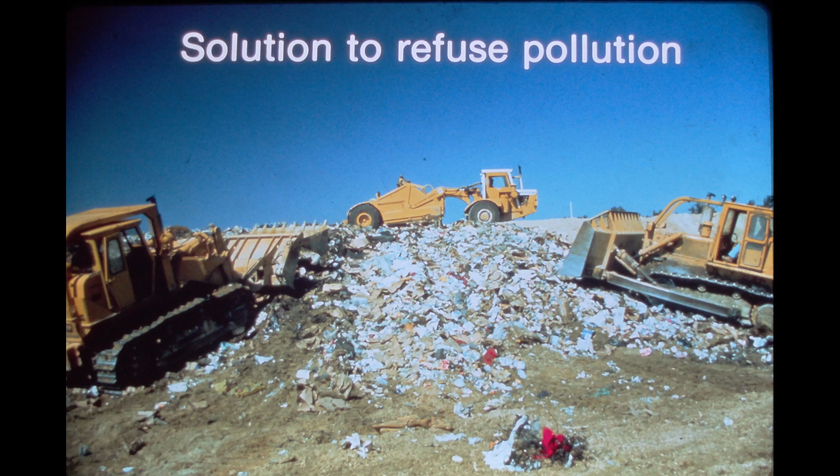The International Payline Group wants to offer you a solution to refuse pollution. This is refuse, waste material with many different classifications: garbage, ashes, unwanted cars and trucks, just to name a few. Refuse has been a problem since the beginning of man. Through the years, we've solved the problem in different ways.

Indians found it easiest to pack up their teepees and move to another location. When our forefathers established permanent settlements, they simply unloaded their refuse on a vacant piece of land. Thus, we have the establishment of the well-known dump. Of course, with the dump came thousands of rats, millions of insects, and disease and odor. Today, the disposal of refuse is one of the fastest-growing problems we must deal with.

Engineering News and Record magazine surveyed this problem and found the following. In 1916, 95 million people produced 90 million pounds of refuse daily. That's equivalent to 0.9 pounds per person daily. They derived formulas which projected figures showing that in 1986, 265 million people will produce 2.4 billion pounds of refuse, or over 9 pounds per person daily, 10 times as much.

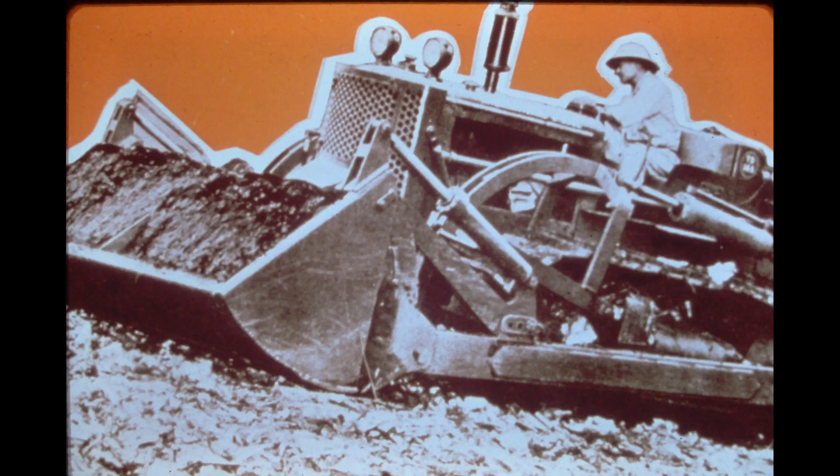Sanitary landfill isn't the kind of business that plugs easily into set formulas. When you set up your operation, there's only one resource to draw on: experience. In the early 1940s, when the military was experimenting with the first landfills, International was called in to participate. And through this early cooperation with the government, we invented the ramp method. It was also during this period that International and Drott introduced the bull clam, later to develop into the multi-purpose bucket.

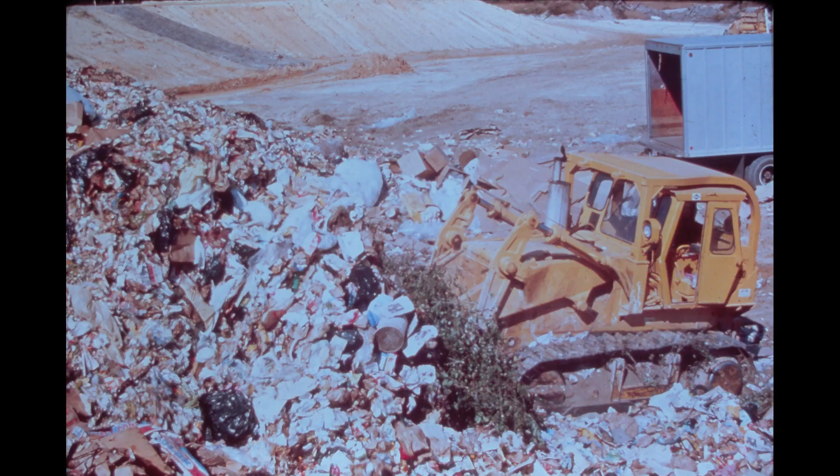Our close involvement in the landfill industry since its beginning has convinced us that it is the most effective way to cope with the refuse problem, and is being used in most of our communities today. Keep in mind that a landfill is not an earth-moving project, and by all means it is not a dump. Its attraction is a result of the advantages it provides over the other waste disposal methods. Let's take a look at some of its advantages.

Low initial investment. The basic requirements are a piece of land, equipment, and a well-planned program. Management is a must. Low operating costs. The equipment ownership and operating cost and necessary manpower is really all there is. Complete and final disposal of refuse. There is no leftover refuse at the completion of a landfill operation. It's neat and complete.

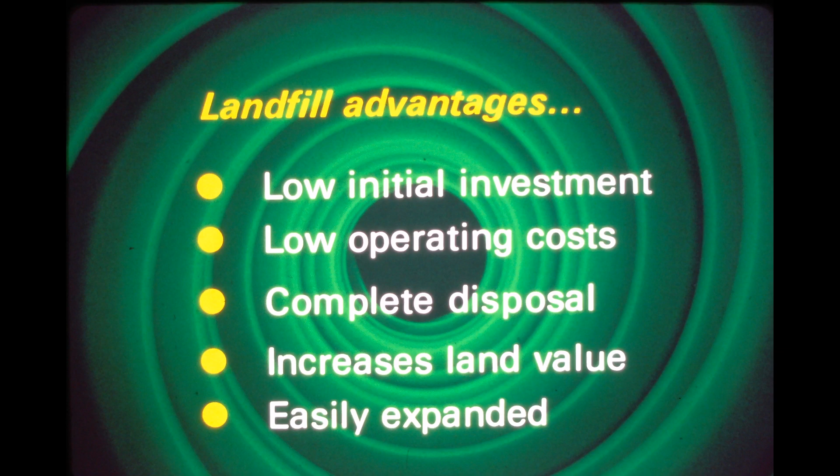Increases land value. Using wasteland gives the community an opportunity to improve the land for useful purposes such as parks, subdivisions, or industry. It's easily expanded. This method is flexible enough to easily adapt to the changing conditions of the community. Additional land is all that is needed. There is no pollution. Landfill operations do not add to one of today's biggest problems, in other words, air and water pollution.

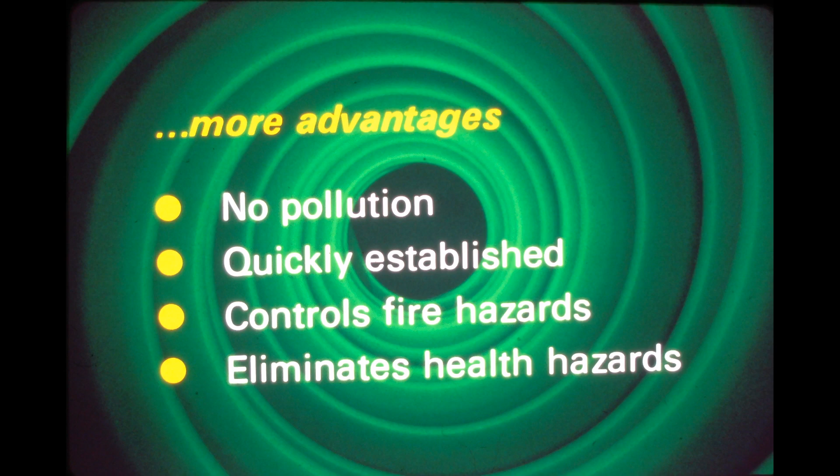It's quickly established. As soon as the equipment arrives on the site, the operation can begin. There's no lag time to contend with. It also controls fire hazards. By not letting refuse lay around, the chances of fire are virtually eliminated. But most important, a sanitary landfill operation eliminates rats, insects, and other vermin, not forgetting the problems they cause.

From an economic standpoint, two of these advantages, initial investment and operating costs, appear to be the most attractive. A closer analysis of the two explains why. Land. Ideally, marginal land can be obtained at reduced cost. But whatever the cost of the land, a large portion of this expense can be recovered through a higher resale value after it has been reclaimed as a result of the landfill process.

Planning and designing. A first-class consulting firm can provide the necessary expertise in the planning and design of your landfill, including testing, geology, and subsurface evaluation. Any land purchase should be contingent upon subsurface exploration. The consulting firm is also aware of and can cope with the legal and political issues which will surely arise.

Site development. Land clearing, drainage features, building access roads, installing utilities, fencing, and landscaping are all functions which must be performed before the first load of refuse is dumped. Facilities. You will need administration and restroom accommodations for your personnel, as well as a maintenance shelter for equipment. Equipment. Equipment, which will be discussed later, can be your largest initial expenditure.

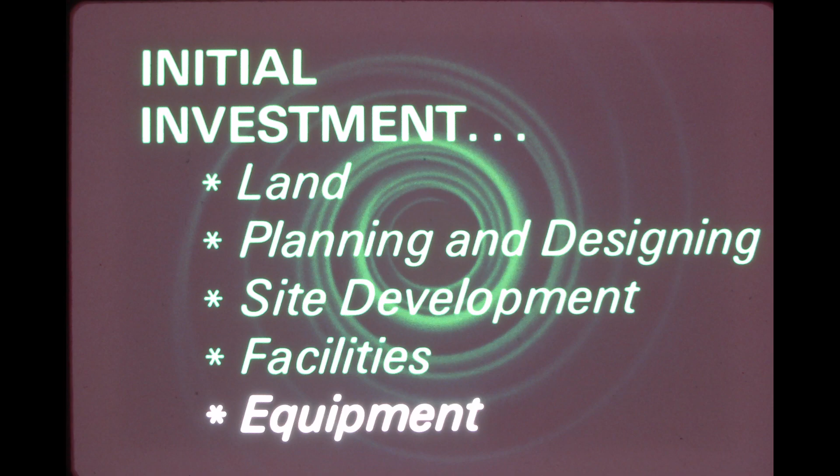In the operating costs area, the first item to be considered is personnel. Relatively large landfills can be effectively operated with minimal personnel requirements. Equipment. Equipment owning, operating, and maintenance costs are about 40% of the total operating costs. Miscellaneous. These costs, administration and overhead, for example, make up only about 10% of the total.

By necessity, this analysis is very general in scope and will widely vary according to the size, type, and operational efficiency of the individual landfill. For example, lack of cover material and/or use of a landfill method requiring excess handling of cover material might significantly reduce the profit margin of an operation. However, careful planning will help assure an efficient operation.

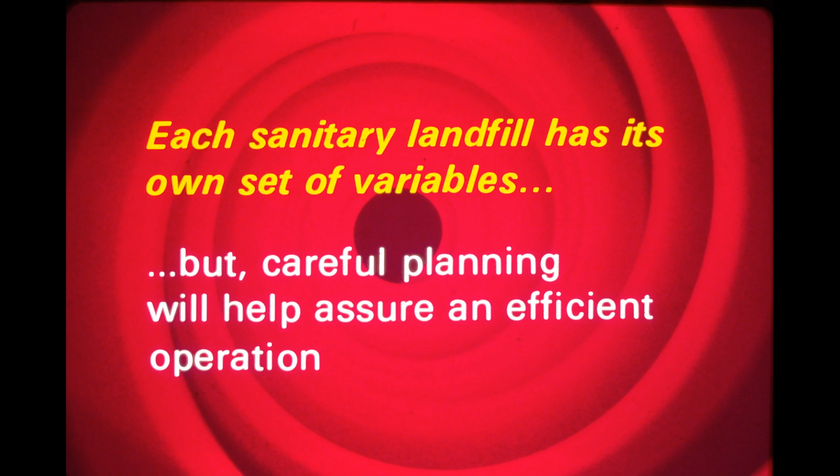Careful planning begins by selecting the proper landfill method. That is, how can the refuse be most efficiently buried on the property selected? Initial questions must be answered, such as, what methods are feasible for the community, and what are the limitations of each? What are the overall costs of each method? A successful solution for one may not work for another. Improper application of a method to your operation could be disastrous. Let's take a look at the available methods for disposing of daily refuse.

Basically, there are three methods to choose from: the trench method, the area method, and the ramp method. Analyze your needs. Don't let other landfills dictate your requirements. The method you select should depend entirely on the site. Choose the one that allows you to operate at the least expense.

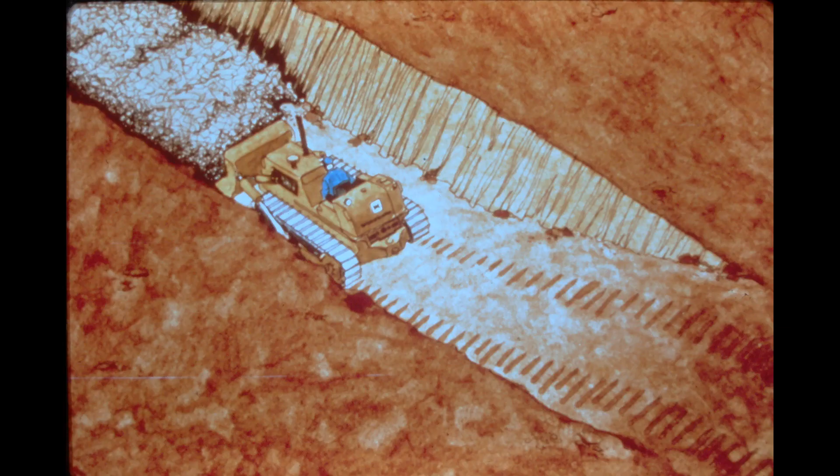The trench method is best suited for level or gently sloping land where the water table is not near the surface. If you're considering this method, remember that there is the need to handle cover material twice: excavating and stockpiling, and then filling. This is an added expense. There are three ways to work your trench, depending on how you choose to excavate.

One approach is the single progressive trench. In this technique, the trench is excavated only far enough to provide working space. As cover is needed, the excavation is continued. Since only 1 part cover is used to 4 parts refuse, you will constantly be faced with excess material.

A second approach is the single trench. In this approach, the entire trench is excavated. Cover material is windrowed along the trench sides. Excess material is removed all at one time. The windrows also act as wind breakers to cut down blowing papers. Additional help can be obtained by placing the working face on the windward side of the trench.

The third approach is the dual trench. An entire trench is excavated and the material is disposed of. A second parallel trench is begun at least 2 feet away from the first. As the second trench is excavated, it provides cover for the first. In this manner, trenches are consecutively dug until your site is exhausted.

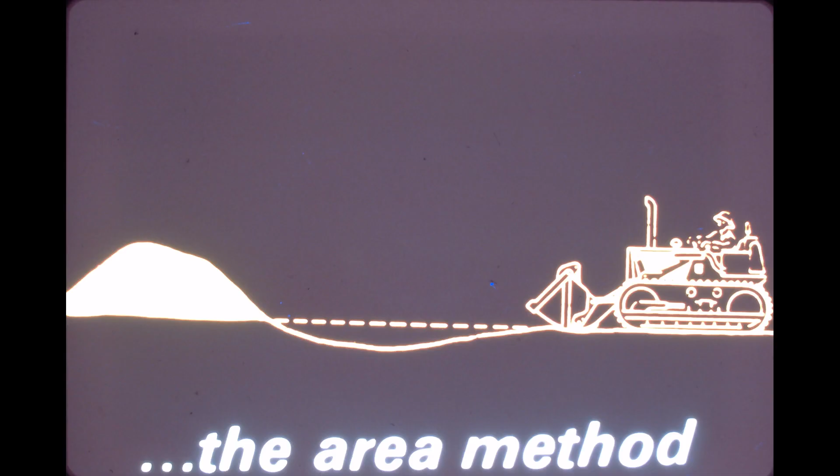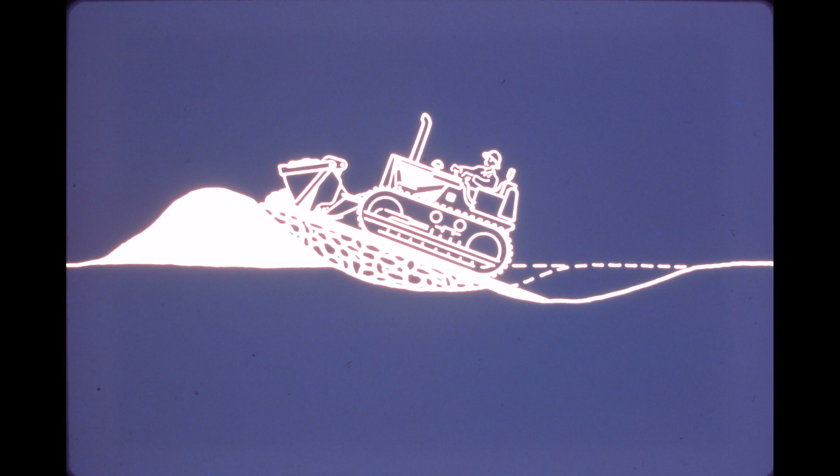The area method is best suited for flat land where the water table is near the surface. While using this method, cover material will probably have to be imported. This acquisition and added dirt handling can be a considerable expense. To begin, a small knoll of material must be formed. This will form your initial working face. Refuse cells are progressively formed, one lift at a time until the area is brought up to the grade you desire. Cell walls are formed by the adjacent cells.

The area method is nothing more than a special condition of the popular ramp method. Inability to dig downward and the lack of a natural working face dictate its use. The ramp method is the ideal approach. No dirt moving or advanced preparation is necessary. The side of a natural depression can be used for an initial working face. Although the water table should be considered, this is not nearly as critical a problem as it is when excavating trenches. Refuse is dumped at the base of the ramp.

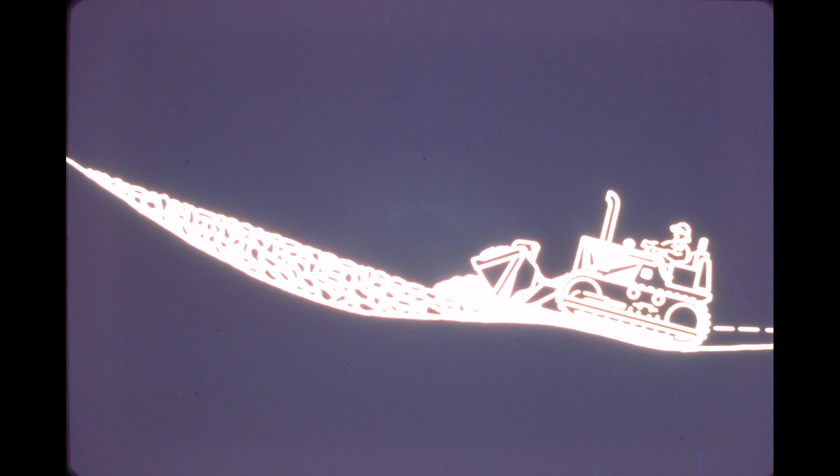The amount or number of loads dumped depends on the ramp size, the equipment size, and the daily tonnage to be handled. The refuse is then spread up the ramp in a layer not more than 2 feet thick and compacted into a layer not exceeding 6 inches. Generally, a compaction ratio of 4:1 is sought before additional spreading takes place. The procedure is repeated until the end of the day or until the cell reaches a height of 8 feet. At that point, cover material is spread over the refuse and compacted to a 6-inch layer.

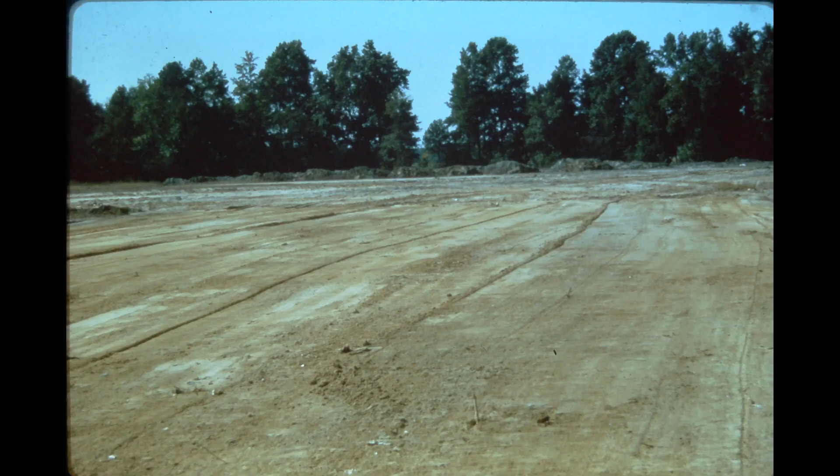At the end of the day, this is how the landfill should be left: clean and odorless, with no pests. No dumping should be allowed until morning, so that each day's deposit can be completely sealed with 6 inches of compacted cover material.

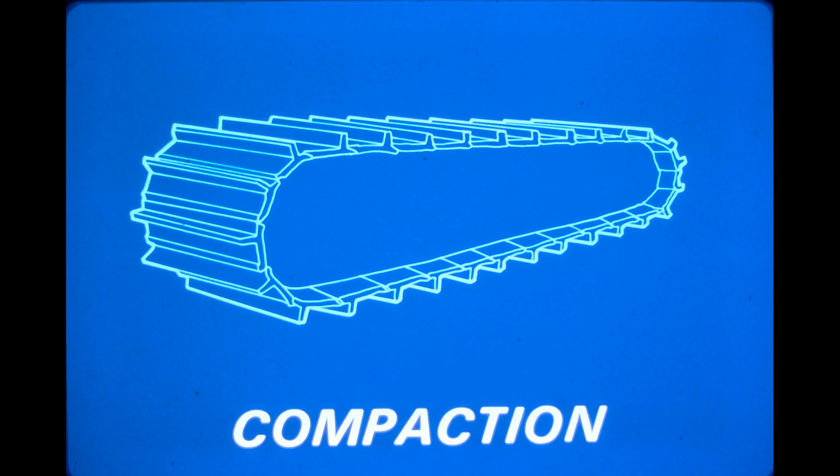While discussing landfill methods, we mentioned compaction of refuse. Proper compaction is critical for good final results in a landfill project. Let's take a closer look at compaction relative to construction equipment. Flotation and compaction are inverse functions. That is, the more capable your equipment is in obtaining one, the less capable it is in obtaining the other.

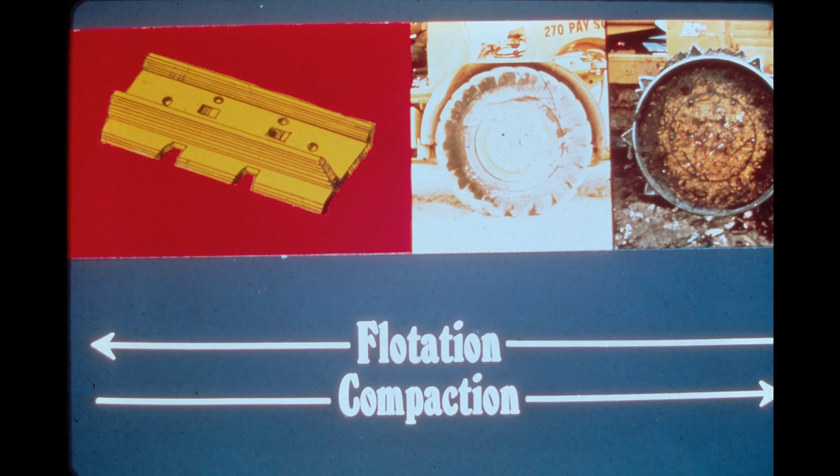Compaction is achieved from the proper combination of weight and pressure. A concentration of weight over an area provides the pressure necessary for compactive effort, or PSI. The smaller the area of concentration, the higher the PSI.

Because of its design as a flotation machine, a crawler dozer's compactive effort varies between 9 and 11 pounds per square inch. A crawler loader achieves slightly higher compaction than a dozer in its same horsepower class. This is possible because the shorter track of the loader allows the total weight of the machine to be concentrated over a smaller area.

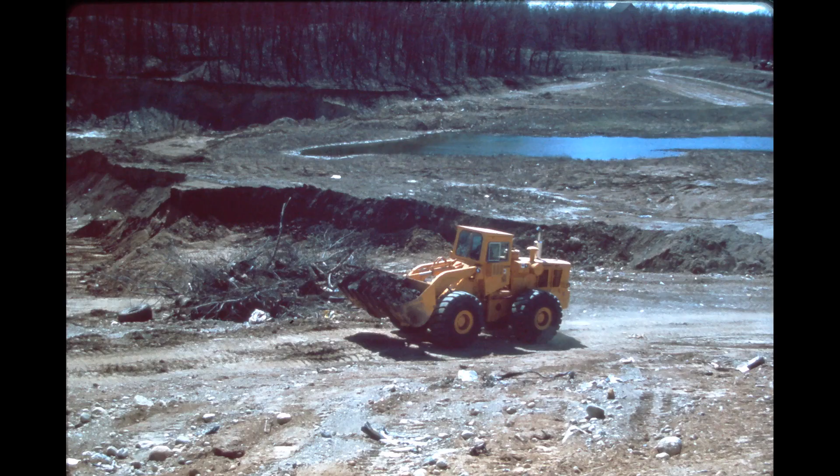A rubber-tired payloader can obtain as much as 3 times the pressure of a crawler machine. This results from the payloader's tire contact area being considerably smaller than the track on ground of the crawlers.

However, a high PSI can be obtained from the so-called ironing action of a crawler loader equipped with a multi-purpose bucket. The operator rests the loaded bucket on the refuse, applies slight down pressure, and drives forward. The weight of the machine with loaded bucket, hydraulic down pressure, and the thrust of the machine, all concentrated on the bucket compaction plate, yield ground pressures in excess of 50 pounds per square inch. This is the most efficient method of compaction when using crawler loaders.

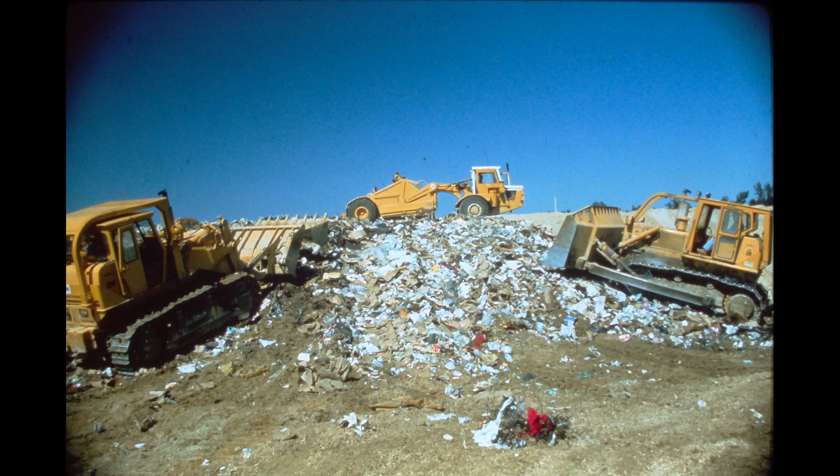Now, after you've chosen the proper method for your operation, it is time to make the most critical decision in making your landfill a success: machine selection. The real cause of an unsuccessful operation can almost always be traced back to improper machine selection. The sanitary landfill planner has 2 primary considerations when selecting equipment: the size and the type.

In earth moving, it's fairly simple to determine the size of the equipment which it will take to move all the material in pile A to pile B in a given time. The material being handled is easily classified, fairly consistent, and the production requirements are known. Refuse, on the other hand, is a mass consisting of garbage, trash, construction debris, and other assorted wastes. Incoming volumes may vary considerably, and fluctuations are unpredictable. How much daily cover material is required? How far must you transport it?

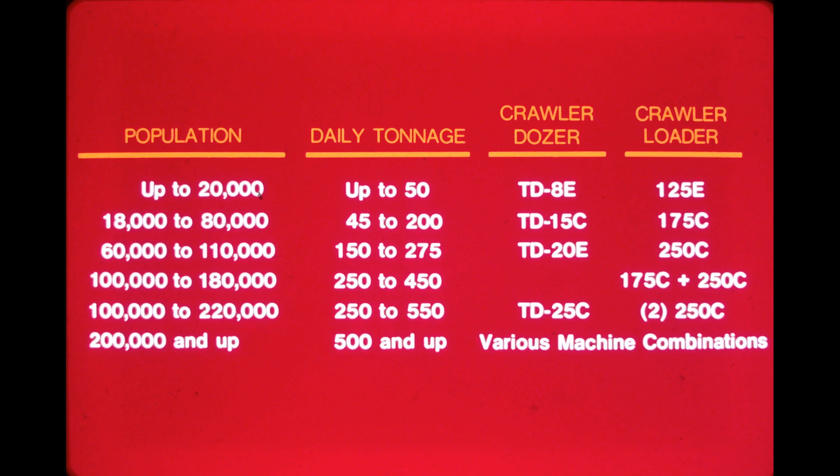There are no definite rules in equipment selection. There is only experience, and International, with its distributor organization, is the most experienced in the business. We suggest the following general guidelines based on population and average daily tonnage. These tonnage figures are based on 5 pounds per person per day, the current national average.

But a word of caution here. Refuse is currently being produced at a disproportionate rate to normal population increases. Therefore, the equipment you choose should have the capability of handling approximately 25% more refuse than is currently being generated.

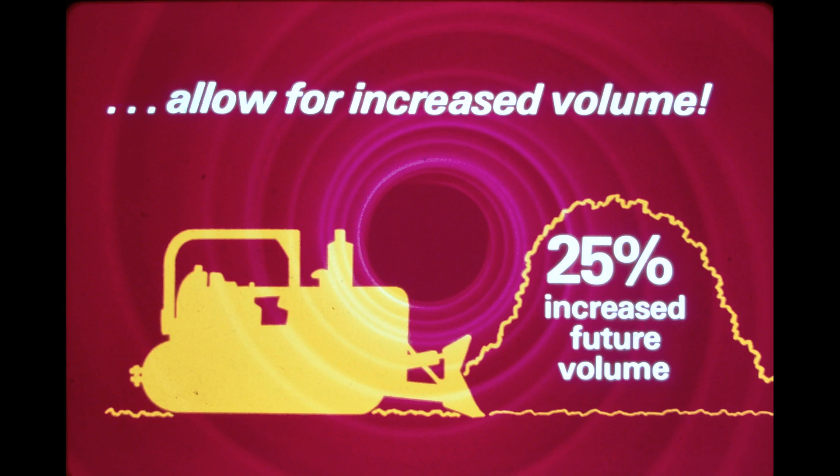Dirt moving distances, population size, and the method you choose for operation will be the primary concerns when selecting equipment. This selection breaks down into 4 categories: crawler dozers, crawler loaders, rubber-tired loaders, and scrapers. Crawler dozers are well suited for ramp and area fill methods. Up to about 300 feet, the dozer will effectively excavate and transport cover material. Beyond that distance, other equipment becomes more economical.

It is a machine capable of preparing the site, spreading, compacting, covering, building and maintaining access roads, and land clearing. Its excellent flotation and tractive ability make it an all-weather machine.

The crawler loader, especially when equipped with a multi-purpose bucket, is also an excellent tool for the area and ramp method. In addition, its highly efficient excavating capability makes it ideal for trench operations. For example, since the bucket doesn't extend outside the tracks, higher compaction is obtained close to the trench walls. Like the dozer, it is capable of functioning regardless of climate. Maximum cover haul distance is about 300 to 500 feet.

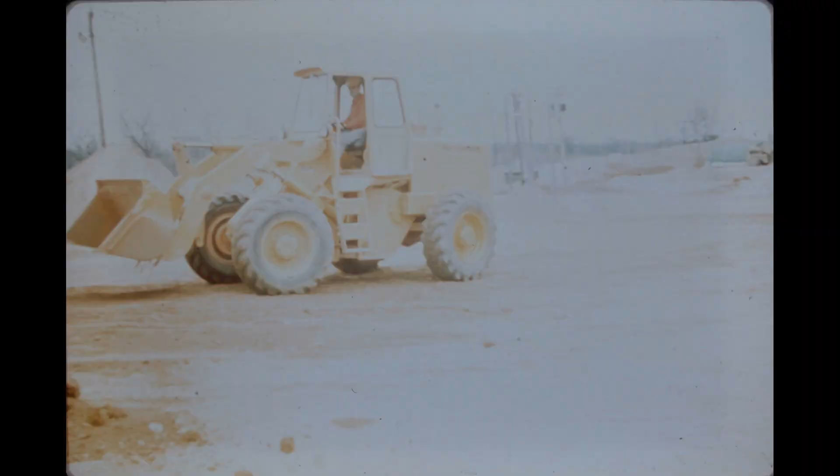Mobility and versatility are key words if you select a rubber-tired loader. As a result of its high-speed design, cover material haul distances in excess of 600 feet are economically feasible. A big advantage, of particular interest to smaller communities, is the potential of roading your payloader to other job sites during those periods when the landfill is not in operation.

Scarcity and excessive requirements of cover material dictate the necessity of payscrapers. These high-speed machines make it possible to quickly move large volumes of cover over long distances. The elevator design provides large quantities of fluffed material, which is more easily compacted. The open bowl is perfect for excavating and stockpiling large volumes of cover for larger operations. The scraper can also assist in excavating trenches if necessary.

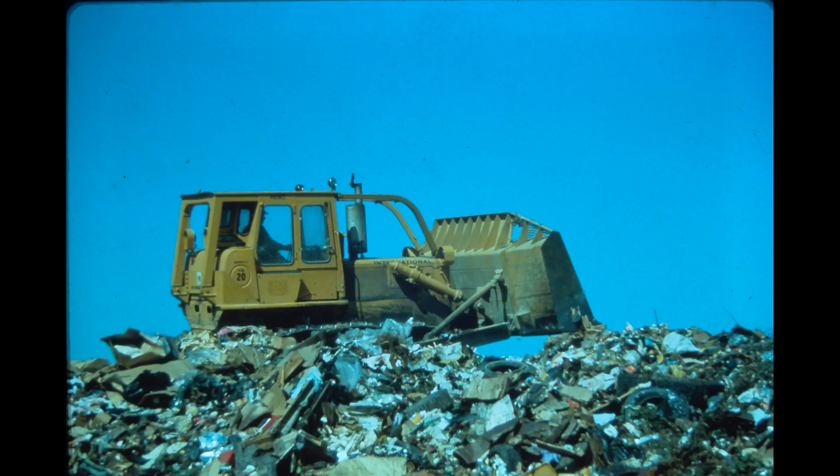We said earlier that compaction and flotation were inverse functions. Nowhere is this more evident than when production must continue even in inclement weather conditions. A crawler is capable of operating under wet, muddy conditions where a rubber-tired loader might encounter tractive difficulties.

Also, since the tires will penetrate deeper into saturated refuse, the machine's weight is distributed over a larger area, and the compactive effort is less. Thus, the compaction advantage over a crawler is reduced.

A sanitary landfill is the most adverse application in which construction equipment operates, bar none. To better protect the machines when working under the hostile conditions of the landfill, we provide various attachments. For example, a ROPS canopy with seat belts is standard equipment on International machines. But an added safety feature in the form of our canopy rear screen could be a wise investment. In addition to protecting the operator from flying debris, it also serves to protect the fuel and hydraulic tanks.

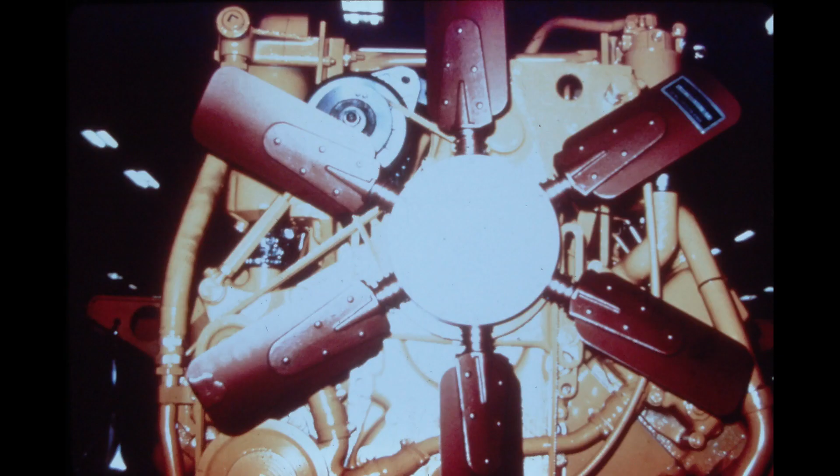To ensure operators' safety and comfort, we offer a deluxe ROPS cab. This cab isolates the operator from dust, precipitation, and extreme temperatures. One of the more prevalent dangers on a landfill is radiator clogging. This causes overheating and could result in serious maintenance problems. A valuable aid in combating this problem is our reversible pitch fan. A quick adjustment reverses the airflow for fast and effective assistance in cleaning the radiator core.

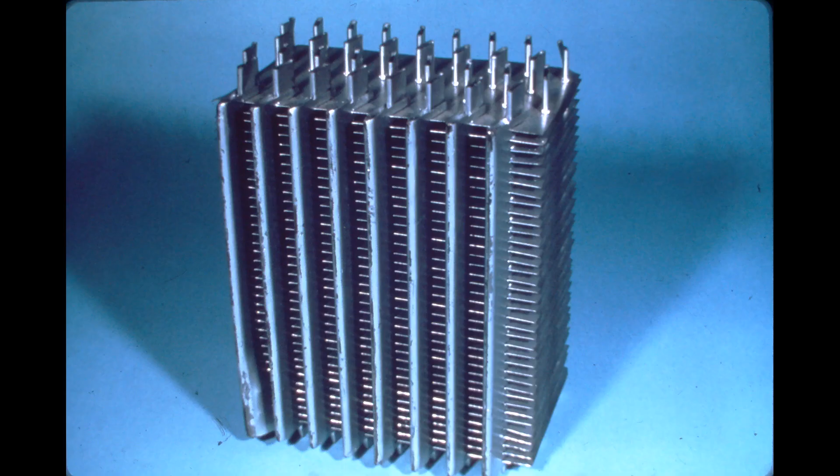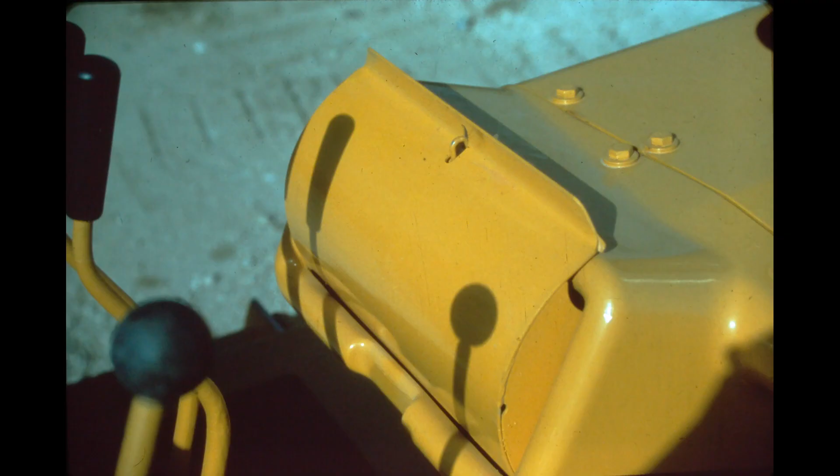For added protection and longer life, we suggest the armored core radiator, which is standard on crawler loaders. This radiator is better able to withstand the sandblasting effect created by those ever-present minute particles. Vandalism can be effectively decreased with our vandalism protection attachment. This attachment consists of a lockable exhaust rain cap, locking filler caps, and padlocks for the radiator cap, toolbox, hood access door, and instrument panel guard.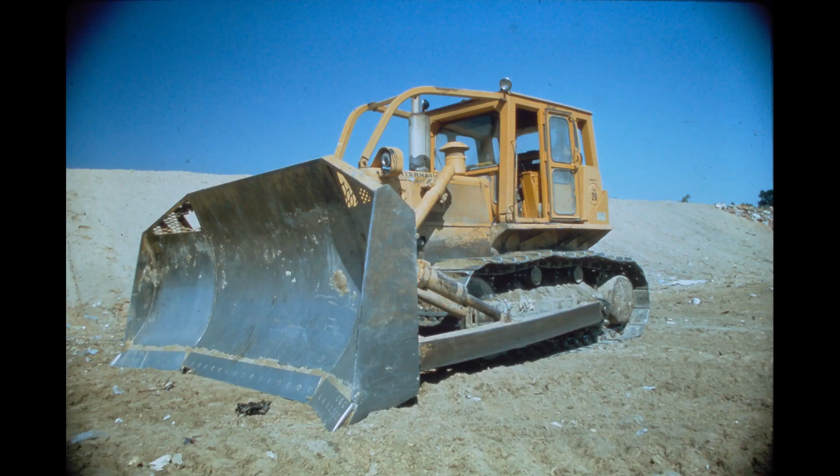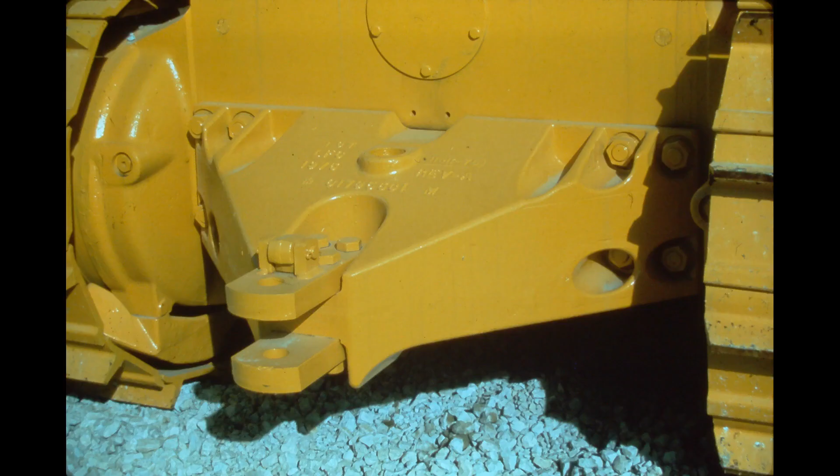To facilitate the fast and efficient movement of large volumes of relatively light material, we replace our semi-U blade with a U or Rockland blade. Our counterweight drawbar combines the added weight necessary to increase compaction and provide better balance with the extra benefits derived from a drawbar. In light of the almost continuous operation on slopes and unstable materials, the counterweight adds to the loader's balance, while simultaneously providing increased compaction.

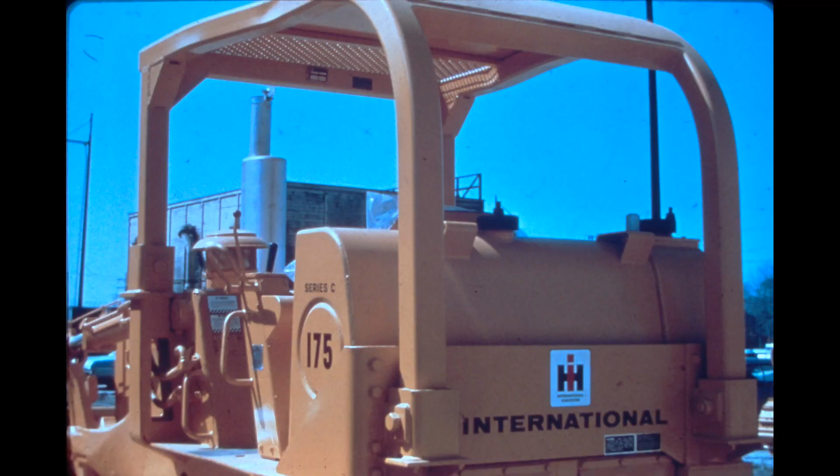To keep the machine operating longer between fuel stops, we offer an increased capacity fuel tank. This tank provides approximately 1/3 more fuel to significantly reduce the costly idle time spent in refueling. The widespread presence of all types of wire and plastics pose a continuous hazard. These materials have an uncanny ability to work themselves into areas where they can cause considerable damage. Our guard package, including a sprocket drive seal guard, a severe service crankcase guard, transmission guard, and pivot shaft area guards, provides protective barriers to help prevent damage.

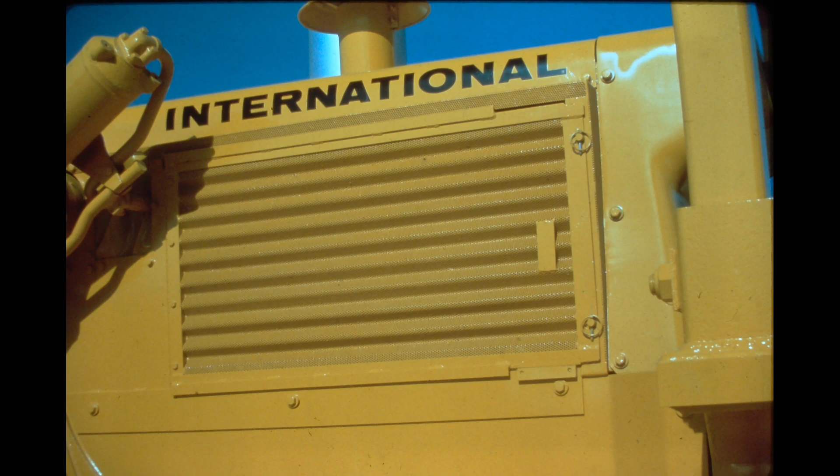The severe service undercarriage, with all its beefed-up components, provides the added strength and durability necessary for long life on a landfill. Our perforated hood and engine side enclosure sheets serve a dual purpose. They permit unrestricted airflow and prevent debris from entering the engine compartment. The perforated hood is also available for loaders. Track frame covers provide protection for the hydraulic track adjusters without the undesirable side effects of accumulating trash.

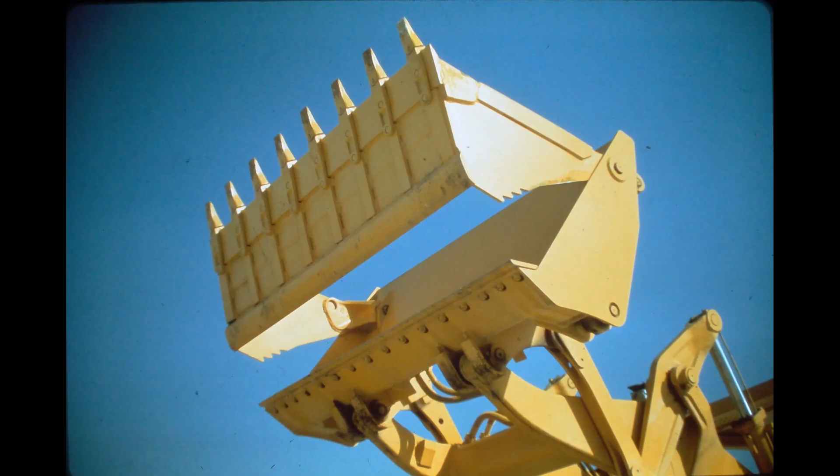The multi-purpose bucket with teeth makes a loader the most versatile machine on a landfill. With this bucket, you can obtain the combined work efforts of a dozer, clam, or scraper in addition to those of a loader. Whatever type you choose, equipment will be your greatest single expenditure, so act wisely. The right selection will make your landfill a success.

Remember, a landfill can be as elaborate or as basic as the community wants. No matter what size, the advantages of a landfill are twofold. Not only have you handled the problem of refuse, but you've given the community a piece of land that can be used for parks, homes, or industry. Or the land can be sold to recover part or all of the initial investment. This piece of reclaimed land might have still been useless were it not for a landfill.